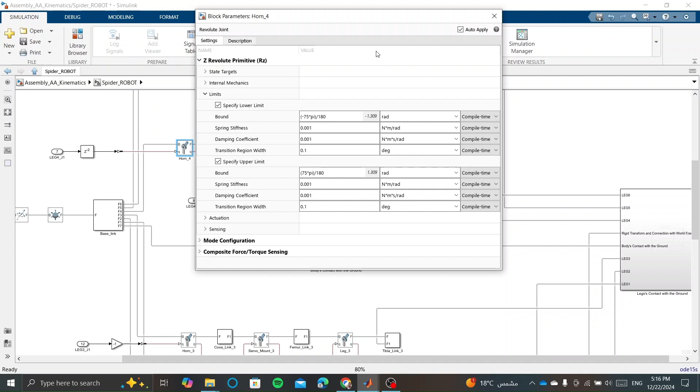That leg, I give it random values of angles so I could see its lower limit and upper limit, and I added some damping and stiffness in order to make it more realistic, like a real joint. After evaluating those parameters, I did this for every leg.

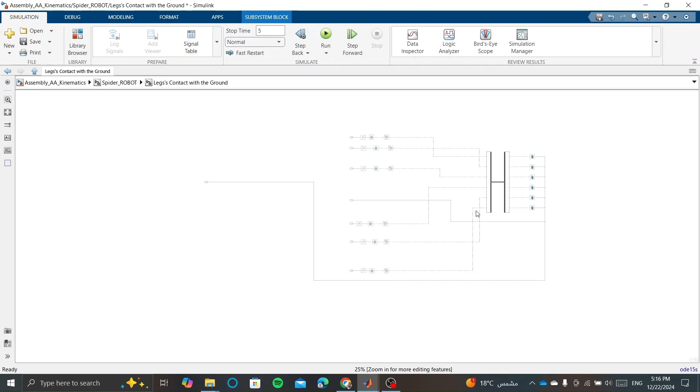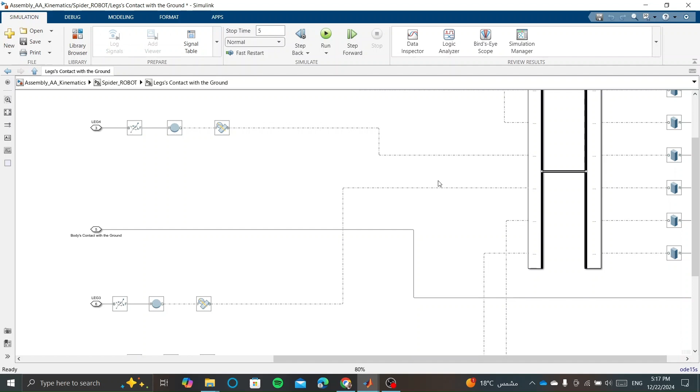Then I had to make the Simulink model understand that there is a ground that the robot will be standing on, so I created a ground, and in order to make Simulink understand that there is a contact between the robot and the floor, I added a special contact force. I searched many MathWorks documentations in order to implement this. It took quite the effort, but it paid off thanks to MathWorks documentations.

And for each leg I had to develop a contact separately, as the block doesn't make a contact with many objects. It just has to be one object and another, not 2 or 3. I have to evaluate this separately. So for each leg I evaluated a contact between it and its ground. I make the same ground for each leg so that it can do its contact freely.

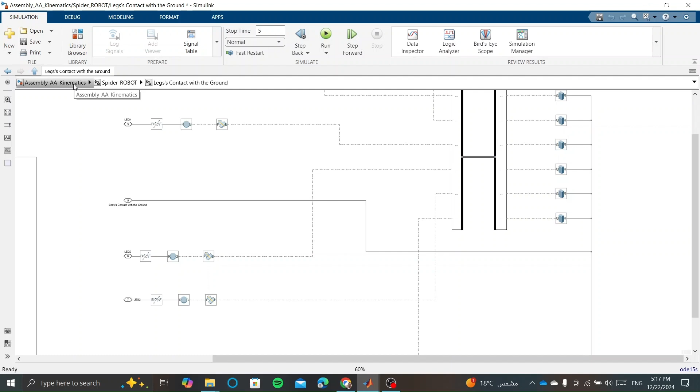After that, the next step was that the robot was fixed to the world frame, so the base was still there, no effect of gravity. So I added this 6 degree of freedom joint so that it allowed the robot to move with no constraints, or with 6 degrees of freedom actually, which are the 3 Cartesian directions and the 3 angular directions.

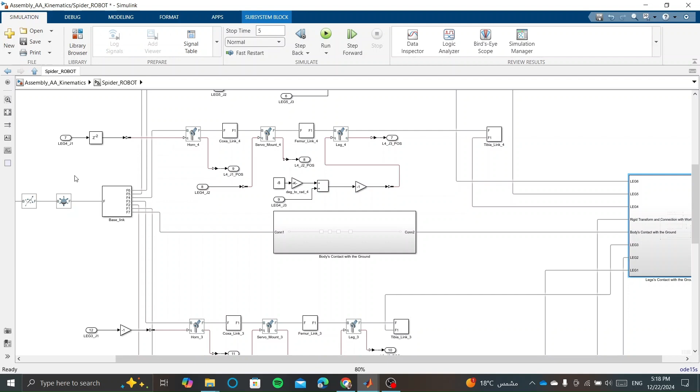And I made as well a contact between the robot body and the floor, in case all the robot's legs slide and open wide, so that the body won't fall down from the model.

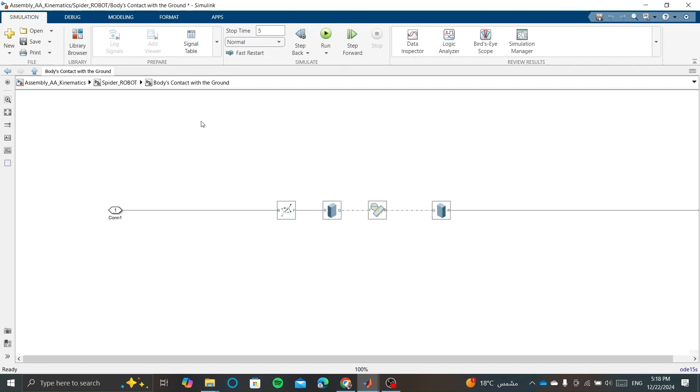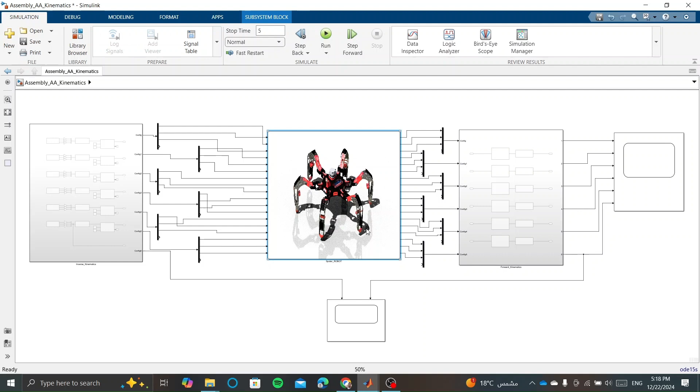After those things, I evaluated simple forward and inverse kinematics. I treated each leg like a robot manipulator having the same base, and I added a joint down there at the tip so that it acts like a target, or the end effector. And here is my evaluation for the forward kinematics. Each line represents a leg and its forward kinematics, having its target and its base.

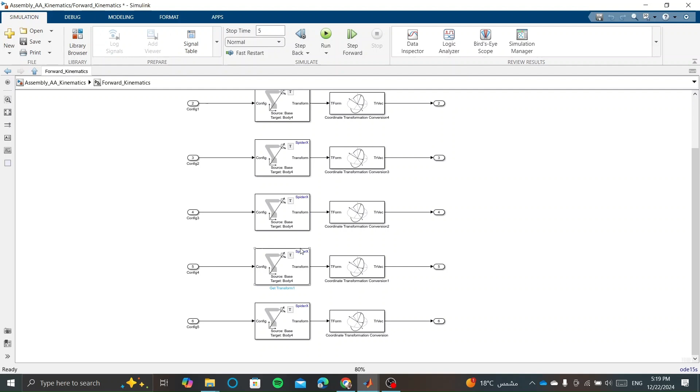Same thing I did with the inverse kinematics blocks, giving it x, y and z values at a specific instance of time so that the robot could go to them. And let's dive into the simulations.

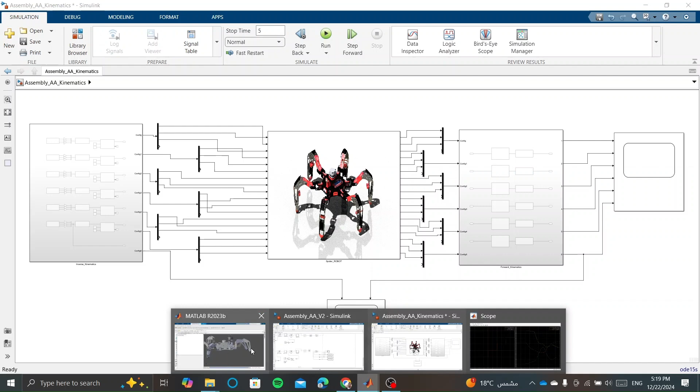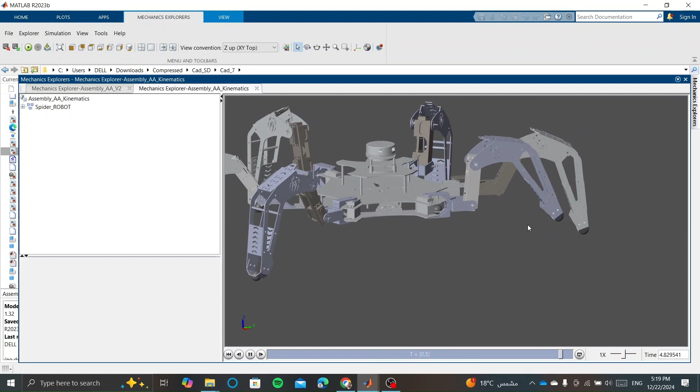That was the robot with no kinematics, just a sinusoidal input to the motors. Here it is moving, and here was the kinematics. I didn't care about the inputs, I just cared about its movement with the random inputs I put in.